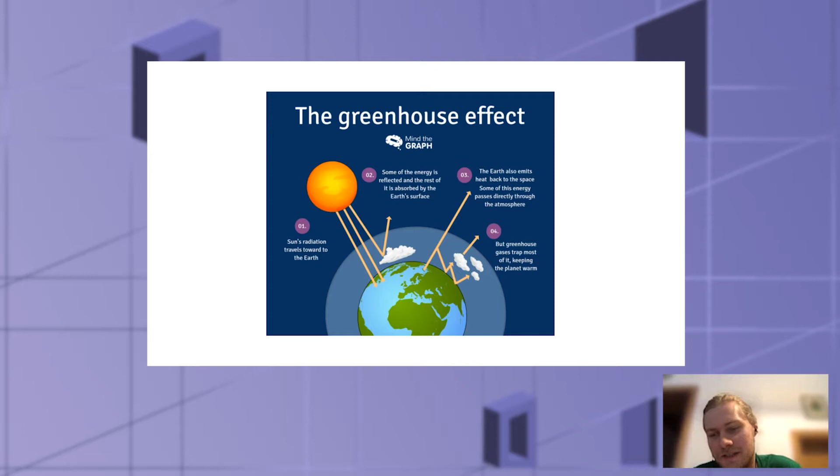Basically, if we did not have any greenhouse gases, we would just be dead, right? It would be too cold to live on the planet. So we need something to trap some heat in our planet. However, the problem is recently we are trapping too much heat, which means it's getting hotter and hotter every year.

This graph shows it very well. It goes from 1880, the start of the first industrial revolution, and you can see year by year that especially in the last 30 years it's increasing a lot. Now from 1880, we have a 1 degree increase in average temperature in the world.

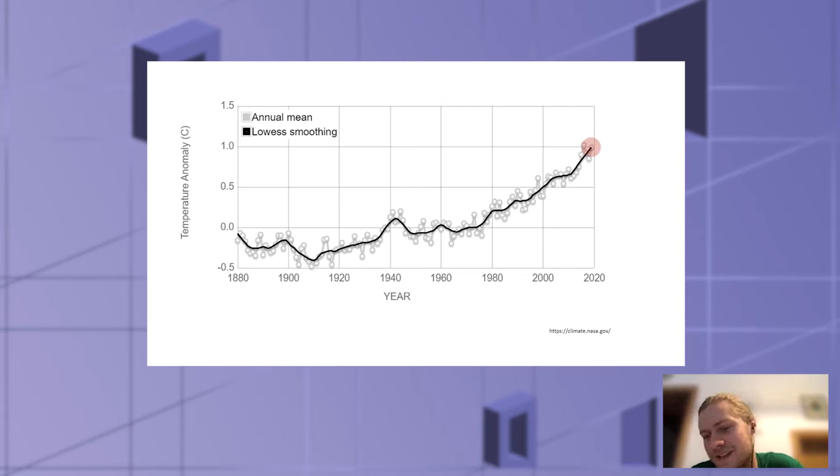You can imagine thinking, oh, it's just 1 degree, is it really a big deal? Why are we worried about it if it's just 1 degree? Like, I had 24 in summer, now I have 25, I'm okay with it. The problem is it's 1 degree averagely on Earth, but this temperature, unfortunately, is not distributed equally all around the planet.

So you can see, for instance, on these graphs, especially on the left, if you have a 1.5 degree increase, in some areas we will have the coldest nights and hottest days decrease or increase by 6 to 8 degrees Celsius. So if you go from 28 to 36, it's quite noticeable, you can feel it as humans.

The problem is, as you can see on these two graphs, in areas where we have a lot of ice, we have a very big increase, which means ice is melting, of course. It's a big problem with potential floods, etc. Also some areas, especially in the Middle East and Southern Europe, I think Croatia is also affected, have like 4 or 5 degrees of temperature increase, even though overall in the world it's just 1.5 or 2.

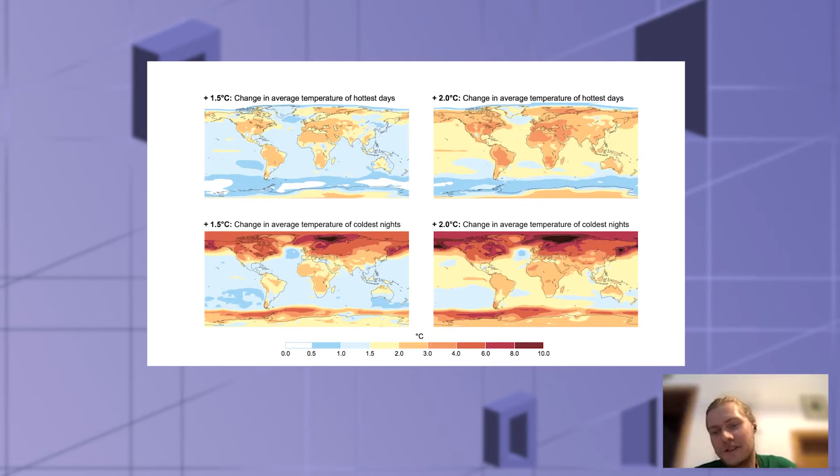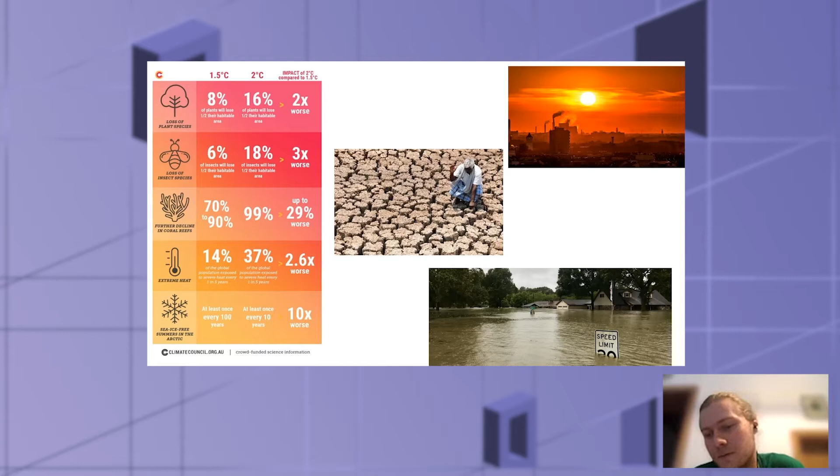This basically means for vegetation, for corals, for heat, that an increase of just 0.5 degree Celsius can give us 2, 3, 4, even 10 times worse outcomes in terms of more floods, more heat, etc. The problem is we are heading towards this 1.5 and 2 degree mark. We're actually going to reach 1.5 in maybe 20 years, or even before, because the temperature is increasing exponentially now, meaning it's increasing faster and faster every year.

Of course, we are not just watching it and doing nothing. A lot of politicians meet for so-called climate conferences. There was the Paris conference, maybe you heard it was very influential, 6 years ago in Paris. Last year it was COP26 in Glasgow, meaning politicians from all over the world try to do something about it, try to make regulations, try to speak with each other.

They try to say things like, 'China, please stop emitting so much carbon,' and China says, 'Sorry, you were emitting this carbon for the whole last century, why do I need to stop now?' This battle just continues. So as you know, it's very naive to think that in a world where, as we recently noticed, wars are still happening, that all countries will somehow reach an agreement to do something.

So they are speaking, trying to regulate it because it's quite urgent nowadays, but I don't believe much that these politicians will reach something very crucial, and the whole world will go towards something altogether. Unfortunately, it's not possible nowadays.

So let's speak about greenhouse gases that are causing this temperature increase, so possible heat waves, floods and other disastrous things. We have three main greenhouse gases: nitrous oxide, carbon dioxide, and methane. And you see that they are quite different in terms of influence on us.

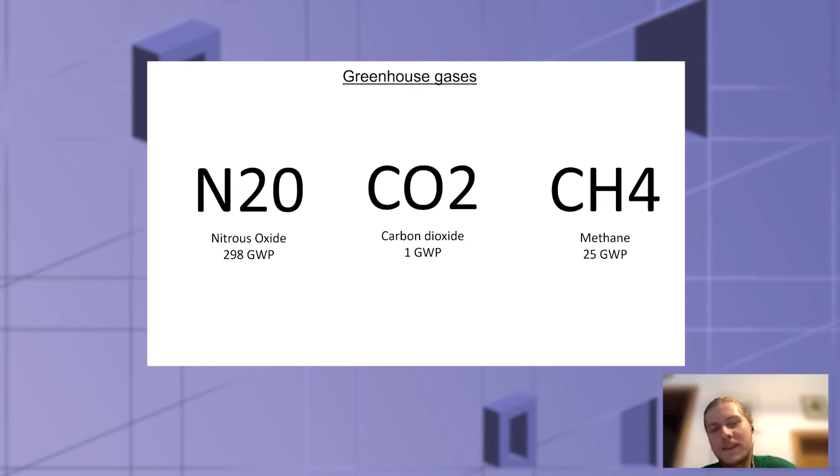When we speak about methane, first of all, it's landfills. Of course it's gasoline, and how we're doing things with oil and burning it, etc. And also cows—another time we speak about agriculture.

For cows, it's very easy. Cows have a very particular stomach, which means they're eating a lot of carbon, which is in the grass, etc. Their stomach somehow transmits this carbon into methane. So you see there are two ways it comes out—from the mouth, or another time, manure. So anytime gases go out of a cow, it's actually affecting our world in a bad way.

Apart from the jokes, if you imagine cows were a nation—if you put all the cows in the world together—they would be the third country in terms of emissions, after the US and China. But the US and China emit a lot of stuff by producing a lot of things. Cows are just living and producing gases, and that's enough because we have so many cows. We have so many cows because the demand for meat and milk products is very, very high nowadays. So it's actually a very big deal.

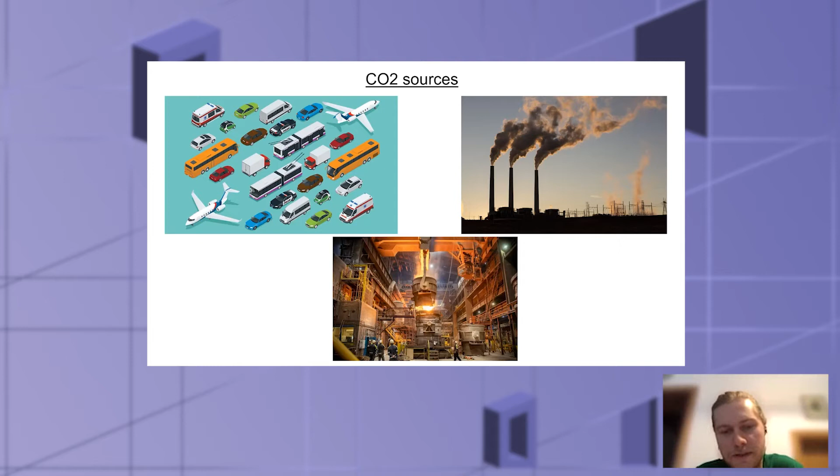So let's speak about which gas is leading the way. Carbon dioxide, even though it's the least harmful as we've seen, we have so much of it that it dominates all the gases. Methane and nitrous oxide are normalized to so-called CO2 equivalent emissions. So every year we have around 50 billion tons of CO2 equivalent emissions.

It's a lot, but I'd like you to remember this: if you hear somebody is reducing carbon emissions, and they say they reduced a ton, that sounds like a big amount, right? But out of 50 billion tons, it's not that big. So remember, we have 50 billion tons of CO2 equivalent emissions, and this number keeps increasing every year, unfortunately. The COVID year was an exception, but now it's increasing again.

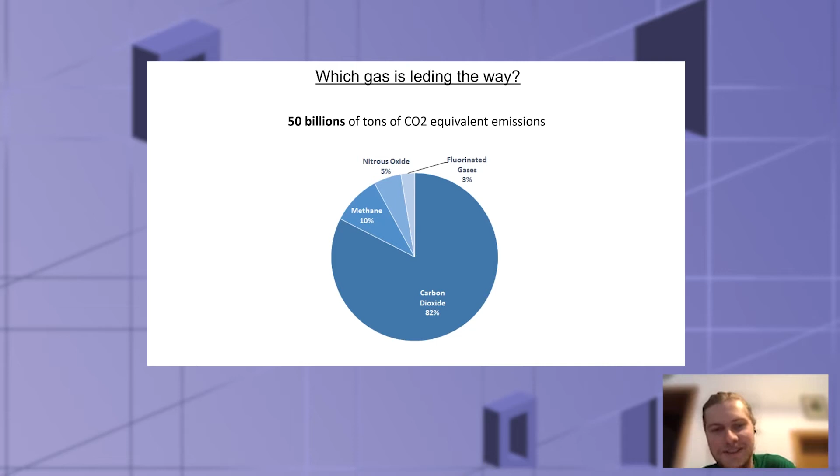And the last thing about these gases, to finish my introduction: they actually last for a long time. For instance, carbon dioxide lasts for hundreds of years, which means if now, let's say, all these climate conferences finally made sense, and we as humans evolved in a way that we stop emitting any carbon dioxide at all, we'd still have to deal with this climate problem.

But the problem is the temperature will still continue to increase because of carbon dioxide that was emitted before in previous years, even hundreds of years before. Methane and nitrous oxide go away eventually - methane is just 12 years - but carbon dioxide is a big deal. This means we don't just need to reduce our emissions, we also need to capture and take this carbon from our atmosphere, including carbon emitted by previous generations.

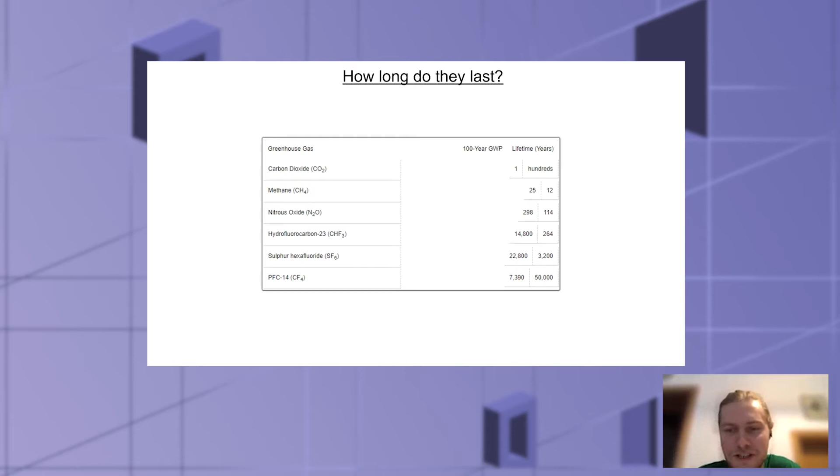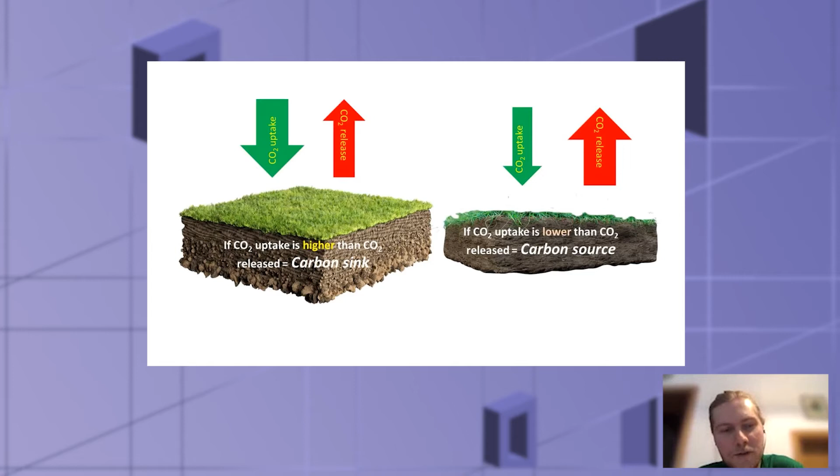Okay, so let's speak about carbon. Today we'll talk about two possible ways of dealing with carbon dioxide. One is carbon source, when we have release of carbon dioxide much more than it's capturing from the environment - like cars, everything. They are carbon sources, releasing carbon. But there's also the opposite: carbon sink, when we are taking or capturing carbon much more than we're releasing it.

The typical carbon sink is, for instance, tree or forest. You're probably familiar that a tree takes carbon dioxide from the air and releases oxygen, so a tree is a carbon sink. Also, the soil is a carbon sink, especially when we're growing crops on it.

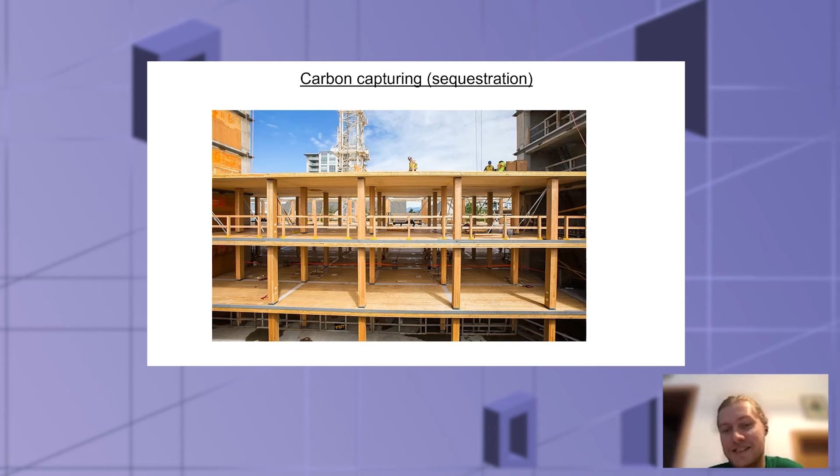But another carbon capturing tool, or carbon sink, could be a building. And this is how we're transitioning to today's topic, which is oriented more towards engineers, civil engineers, architects, etc. Buildings can also be considered a carbon sink - a source that has taken more carbon than it emits. Of course, nowadays that's not the case, but let's speak about what we have.

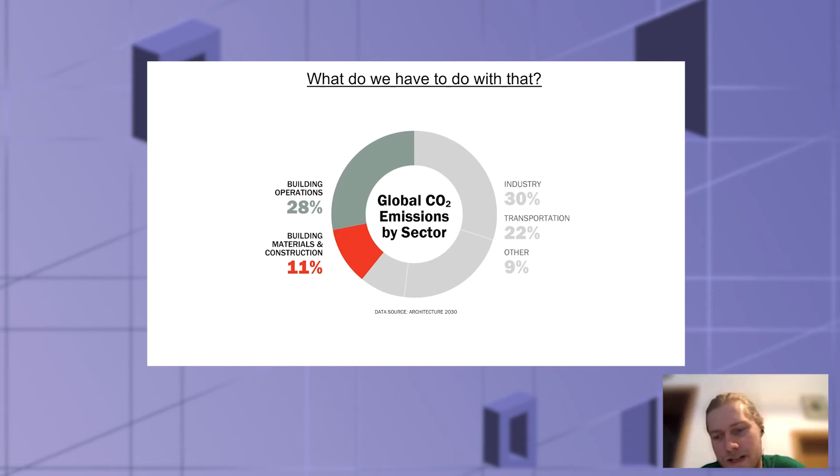Engineers - and probably today we have a majority of engineers in the room - what do we have to do with all these carbon emissions? The problem is that of all CO2 equivalent emissions, 40% comes from buildings. You can imagine if you concentrate on reducing emissions from buildings, we can have a big impact, because it's almost half. 28% comes from building operations, mainly electricity and such, and 11% from building materials and construction.

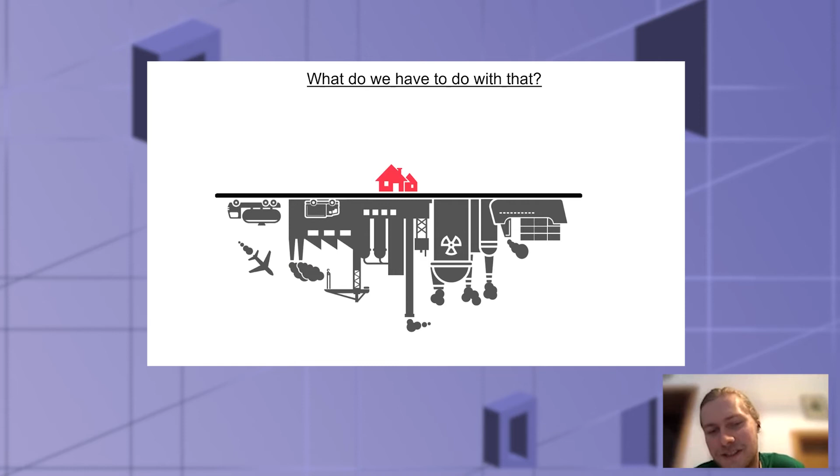This picture, I think, was very mind-opening for me, to be honest. We see just a house, and it's quite small. But what's behind the production of materials is a lot of factories, a lot of electricity, a lot of transportation, and unfortunately a lot of emissions for each building that we have.

Types of carbon - by carbon I mean carbon emissions, carbon dioxide, okay? I'll just say carbon to simplify it. So the types of carbon dioxide we have in buildings are embodied carbon and operational carbon. Operational carbon you're probably very familiar with - it's electricity, heating, everything we need in the building to sustain life, stay warm, have electricity, etc. There's also embodied carbon, which is emissions from manufacturing, transportation, and installation of building materials.

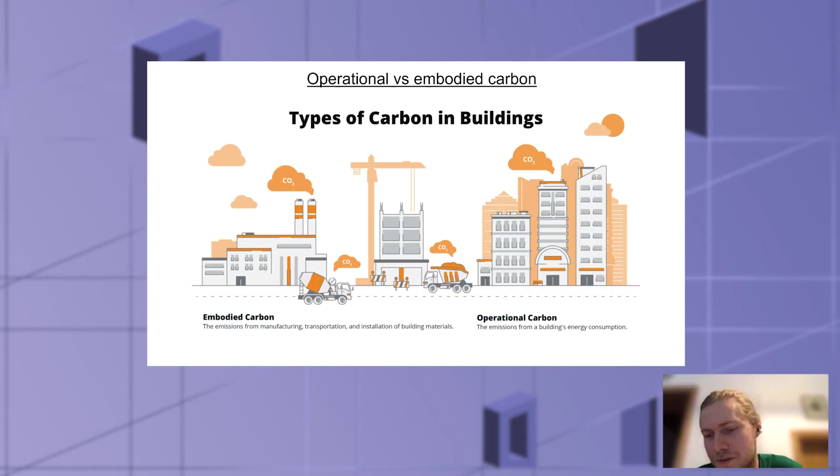So actually, the building you're in now is probably made from concrete. A lot of carbon dioxide was emitted to manufacture this concrete, to deliver it on site, to build the building, etc.

I hope this works as an animation on your screen. It basically shows the relationship between so-called embodied carbon and operational carbon. You see, if you build a building in 2020, it's only embodied carbon - this is something we need to take into account. When we build it, the building itself doesn't spend any electricity yet because it's not finished.

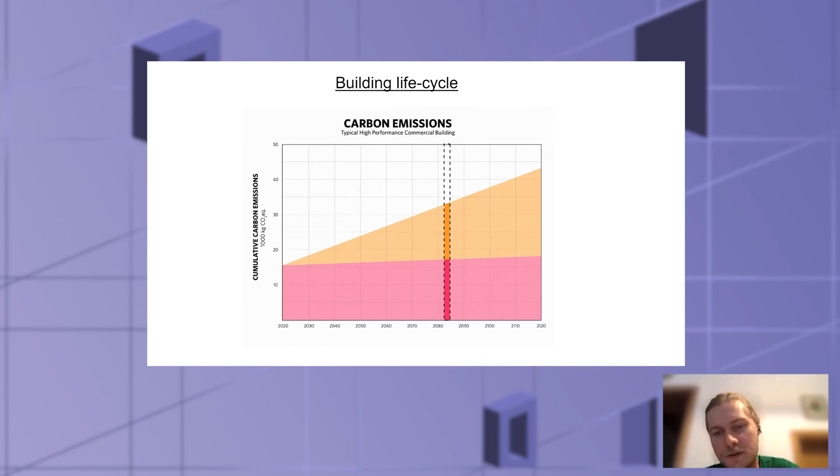It's only embodied carbon, and only after, when buildings start to function, when they start to spend electricity and heat, does operational carbon start catching up. So if we need to decrease carbon emissions right now, we need to concentrate a lot on embodied carbon, because this is something we have once the building is built. Then, after 100 years, let's say it's 60 to 40, so operational carbon is bigger than embodied carbon. However, nowadays, as you've seen from the previous GIF, embodied carbon is almost as important as operational carbon.

So we need to consider them both, right? We cannot consider just operational. However, what we see unfortunately nowadays is that architects, architectural firms, norms and rules are mainly concentrated on operational carbon. A lot of architects are now getting familiar with embodied carbon, which is actually quite a new topic. Two years ago, almost no one was speaking about it. Now people are starting to speak about it much more.

So a lot of architects, also Norman Foster, etc., are criticizing the so-called BREEAM or LEED certificate. Probably you heard about the LEED certificate if you're an architect. A lot of construction companies brag that they have a LEED certificate, platinum, gold, whatever. But the point is, to achieve this LEED certificate you need to get so-called 80 points, and only 3 out of 80 is for embodied carbon. Can you imagine? Embodied carbon is quite half of all emissions, but instead of 40 or 30 points, the LEED certificate gives just 3, kind of ignoring embodied carbon at all.

And this leads to the very ridiculous example of the Foster plus Partners building, the Bloomberg building in London, UK. Of course it reached platinum LEED certificate, the biggest points. A lot of people are saying net zero carbon building, like look at us, in UK we are building at a new level. The problem is, of course the operational carbon is perfect, but they used a lot of bronze and aluminum parts to achieve it. So actually the embodied carbon was much bigger than it would have been with the initial design, if they hadn't tried to reach that operational carbon target.

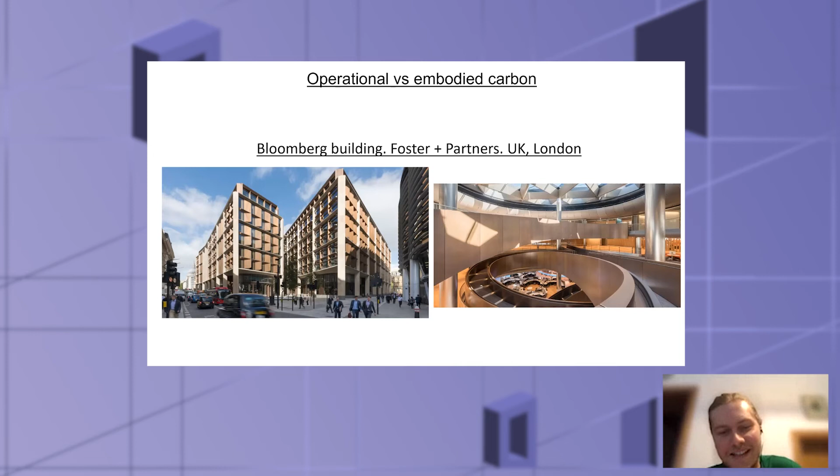Fortunately, nowadays people are opening their eyes and understanding what embodied carbon is and that it also matters. In this sense, the very important, crucial concept is the so-called building life cycle, which means we have a building now, but what actually happened before we entered this building, and what will happen after with it.

Of course, we need to build our buildings from some material. So we need to extract them, transport them to a factory, manufacture them, transport them to the building site, and construct the building - it's all embodied carbon, right? Then we use and maintain our building, and this is where operational carbon comes in - electricity, heat, etc. And then after our building is old, we need to demolish it, and do something with the waste - landfill it or recycle it.

And as you see, it's all embodied carbon. Only the operational part is in the use of the building - actually, use of the building at the stage the building is now. For instance, the building you're in now is in the use stage. But we need to understand that there are very big and important stages before the building is in use, and it's only embodied carbon there. However, this is a linear building life cycle.

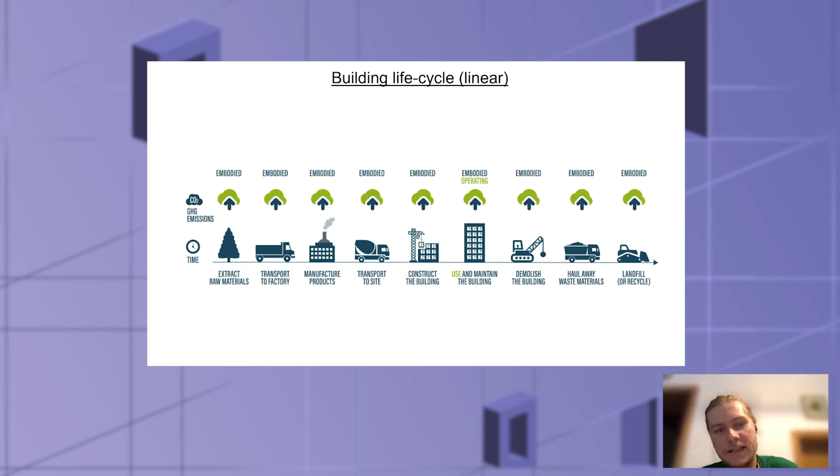But when we speak about circular economy, we need to transfer it toward a circle, which means after the use of a building and its end of life, some of the materials from the buildings we have now can be used for another building, for a new structure. That's how this circular thinking actually works. Of course, if we demolish our building and put all the material left into the landfill, then there's no circular thinking here. But if you recycle, or better yet reuse, then some parts from our current building can be used in the new structure.

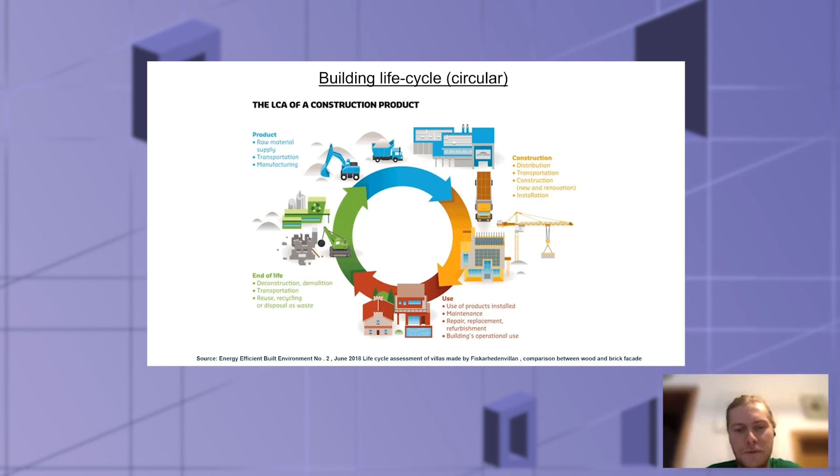This is what we call building life cycle. Let's see how we can reduce this carbon. We understood the problem, embodied carbon and operational carbon. Sounds very depressing, right? If you're an engineer or architect, you're going to work in an industry that is responsible for a lot of the planet disaster that's going to happen with us. So it sounds quite depressing, maybe you'd like to quit. But the good thing is we can reduce both operational and embodied carbon.

For operational carbon, it's something like passive house design, where the building needs to use as little electricity and heat as possible. Then, of course, the source of electricity could be renewable, so we don't need to burn coal or oil to get electricity. Finally we can reach totally zero for good design and decarbonization of the whole electricity and heat grid, and using something like heat pumps instead of gas to heat our buildings.

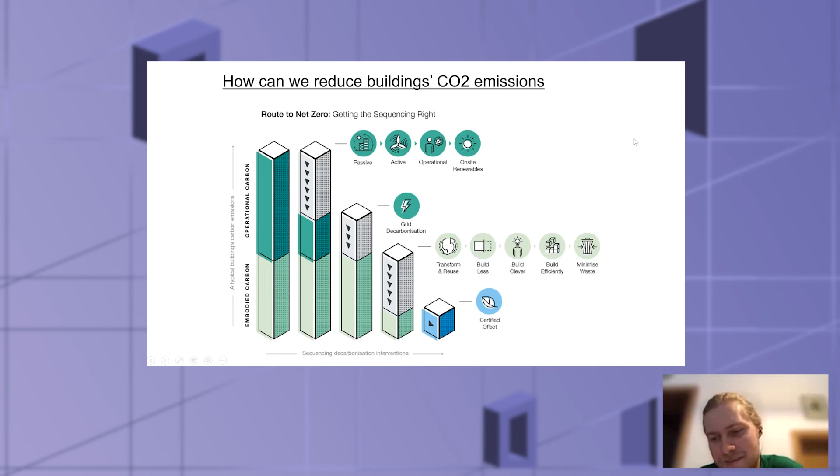For embodied carbon, it's much harder. First of all, as I said, it's a lot about design: build less, transform and reuse, and build efficiently, minimize waste. But even if you do it all, we still have something, because we cannot emit zero carbon when we produce materials. Then we can offset some carbon by means of growing trees, doing something with the soil, etc.

So when we speak about how to reduce embodied carbon, the best case is not to build at all. But if you try to convince all your clients not to build at all, you probably have no job, right? So you are very climate friendly but have no job, because you convinced all your clients not to build buildings at all. Congratulations, very environmentally friendly, your company is bankrupt. So instead, not building at all means not convincing your clients to discard the whole project, but to do so-called adaptive reuse.

So reuse or retrofit the existing structure instead of building a new one. In this case, you would not need to manufacture any materials. Then material reuse, as I already mentioned, and also use of environmentally friendly materials such as timber, bamboo, etc.

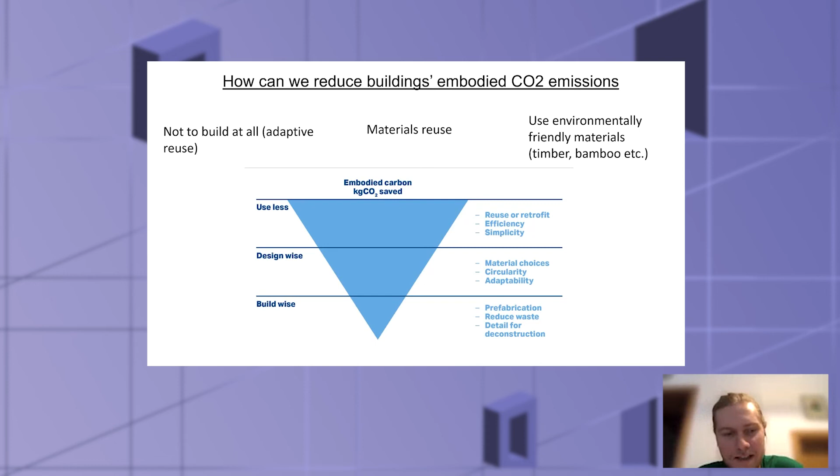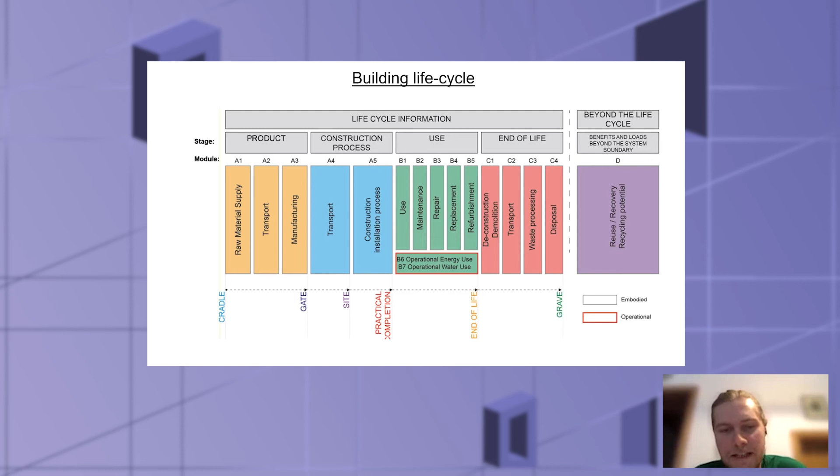Concluding my lecture, and speaking about some regulations that are coming. This is the building life cycle again that I already showed you, but now more in terms of norms and rules. As I mentioned, these production, construction, use, and end of life stages are decomposed by some letters and norms.

For the production stage, we first need to quantify all this embodied carbon. So you can say, okay, it's very good, we need to reduce embodied carbon. Nice news, but how can I actually understand how much embodied carbon is in my building? How can I calculate it? Is it possible? It is - the very easy formula is quantity of the material, whatever it could be, cubic meters of concrete or tons of steel, multiplied by the so-called carbon factor.

The carbon factor is how many kilograms of CO2 emissions were emitted per kilogram of your product. These coefficients are given in norms, in so-called databases. What's funny is that for concrete, it's much smaller than for steel, and even timber, which might suggest concrete is the most environmentally friendly material. But of course it's misleading, because in terms of quantity, we need much more concrete than steel or timber to build our building.

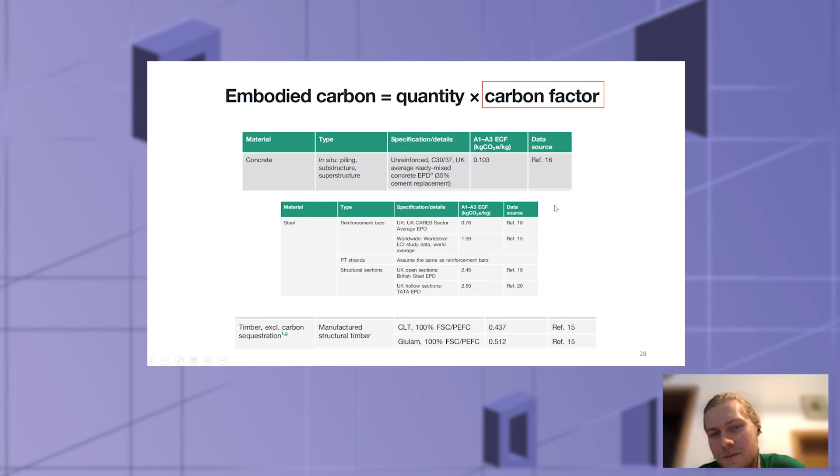And quantity is, I think, more or less clear for everyone - you just calculate the volume of a structure. But this carbon factor is misleading, because you can ask, okay, this value is good, but how do you achieve it? Why is it 0.1 for concrete? Who gives you this value? Why is it like this? It actually comes from so-called databases that are particular for each country. Not every country has one, though.

So, for instance, in the UK they have it, in Germany, Italy, mainly in Europe they have it a lot, in the US. In Croatia, I doubt it, but maybe you also have your own database.

But what is much more reliable to understand this carbon factor is just to use EPD, Environmental Product Declaration. If you use particular concrete from a particular producer, this producer gives you the particular value of this carbon factor, because this producer knows how exactly he or she produces the concrete. So if you are an architect or engineer designing a building, you better ask for this EPD from the manufacturer, because the carbon factors I showed from databases are kind of an average from all. So the value could be anything, because it depends on the particular producer.

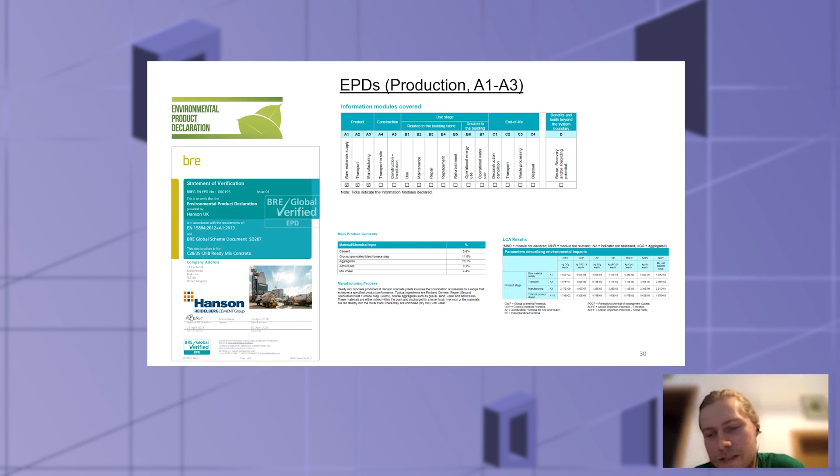Nowadays almost all the big producers in the world have EPDs, and if you're a producer of concrete or steel and you don't have this EPD, you of course have a competitive disadvantage.

The impact of the design, you see all these stages from A to D, as I mentioned: building, reusing, waste, and end of life. We can either design for reuse, in which case D is very big, so we can offset. Design for reuse means that when I design my building, I think that someone will probably dismantle it and use some materials in future structures. Then we can build new buildings with the reused materials. In this case, the impact of the production stage is very small because we don't produce much new material, since we reuse it from previous buildings or do retrofitting of existing structures, reducing manufacturing emissions as much as possible.

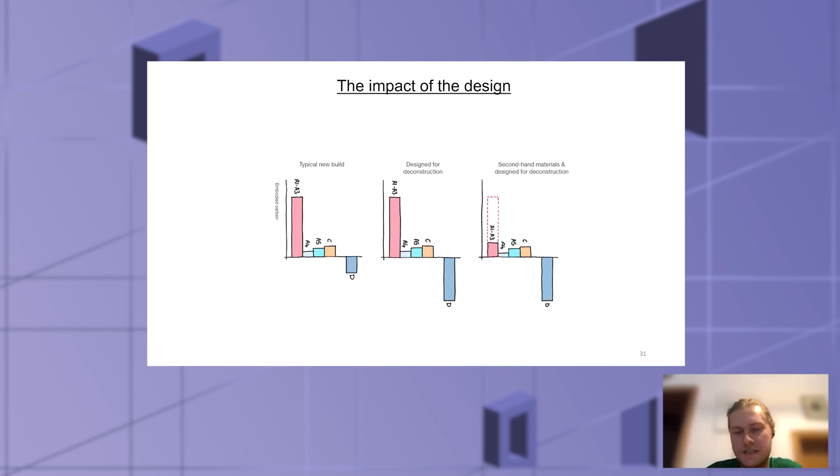When we calculate this embodied carbon, we normalize the results by square meter, because you can have a 6-story building or a 10-story building. Definitely the 10-story building emits more carbon. But if you try to compare them in terms of how carbon efficient they are, you need to normalize it by square meter of the ground. And these values nowadays are quite necessary to calculate.

In these countries, as you see, Denmark, Finland, Norway, Sweden, UK, France, Germany, Holland, in all these countries, if you want to achieve a building permit, you need to calculate embodied carbon. It's not just something that's better to do, you have no choice, you have to do it if you want your building to be built.

In Holland they even went further, and in France from this year and next year as well, they went even further. They don't just ask everyone to calculate embodied carbon, they even put norms, which means these values per square meter are limited. So if you want to build a structure, they need to be below a particular threshold.

Of course, when you design any building, you need to be aware that it's safe, so it passes all the checks from the code. But nowadays, in countries like the Netherlands and France, you also need this building to emit as little embodied carbon as possible. And these norms are given for each type of building, office, hospital, university, residential, etc.

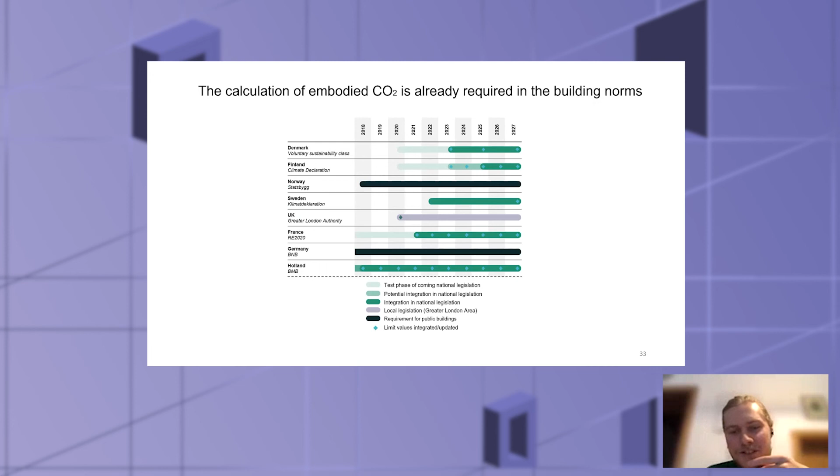This is something that is going to happen all over the world. It's just starting, usually starting from Northern Europe, but I think it will also come to Italy, to Croatia, etc. So this consideration of embodied carbon in your design is quite crucial, and in some countries it's already necessary, but you better start learning it now, because in the future it will probably be necessary in your country as well.

And the last thing, something proposed by some British guys, and probably you saw this kind of picture on your fridge or on some electronics, vacuum cleaner, microwave oven. At least in Italy I can see it on almost all electronics. I believe in Croatia you probably have something similar, which is a characterization of how environmentally friendly your fridge or whatever is. So there is a proposal to do something similar for buildings as well. It's not something approved yet, but very probably our future buildings will have something similar on them.